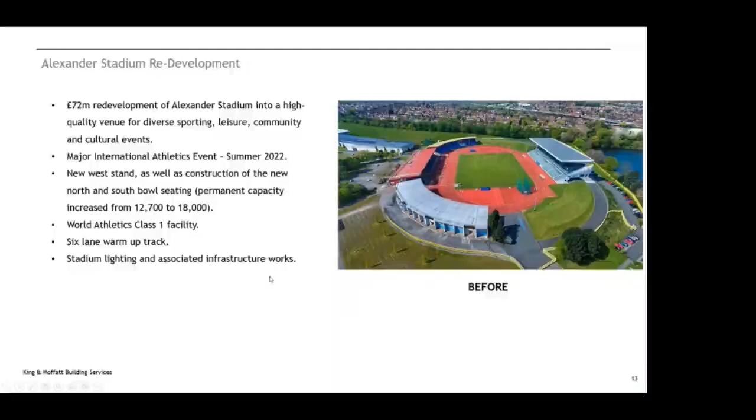Okay, so just some of the stakeholders in the project. The end user, owner and operator is Birmingham City Council. The main contractor was McLaughlin Harvey, and the location was Perry Barr, Birmingham. It was a design and build project taken from a stage 4 design created by our consultants, and the final account was valued at £12 million.

We started on the project at just under £8 million, so there was quite a lot of changes throughout the process.

Some of the things we had going on during the tender stage: we had a very close relationship with our key partner, McLaughlin Harvey, from previous projects. We had local offices in Coleshill and Stoke. We've recently relocated our Stoke office to Wolverhampton, but we were in the vicinity of the Midlands.

Obviously the pre-construction, the planning, the programmes and the organograms were created at tender stage, and it was a very close bid all the way through. There was a lot of information we had to put a lot of effort into to be successful on the project.

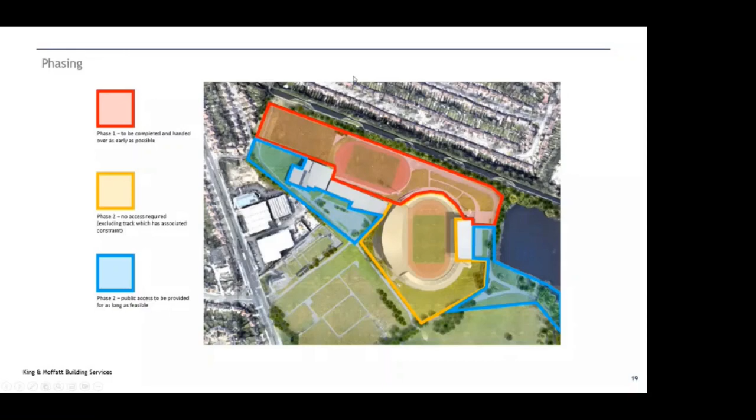Sorry about this. That's the one, sorry, a bit sensitive on the mouse, do apologise.

So we had the design at RIBA stage 4, and it was given to us as a stage 4i, which was an unusual situation for us because we were used to BG6 and RIBA stages being pretty generic, so the design was given to us as an intent. We took on board the full design responsibility, and we brought Hoare Lea in to take on the design responsibility as a local MEP design consultant.

We brought in local contractors for CDP elements, which were the fire, the life safety, the security, the CCTV, the AC systems. These were all CDP elements of design.

What we did find during the pre-construction activities and design phases of the project, under lessons learned, was that we had quite a lot of clashes at stage 5, because the tolerances that we brought through the models were greater than we were going to build to. So when we took over the BIM model, we had quite a lot of clash management and clash detection going on, which meant we had to alter a lot of the routing of the services, and there was an exclusion zone put in on the original clauses in the contract.

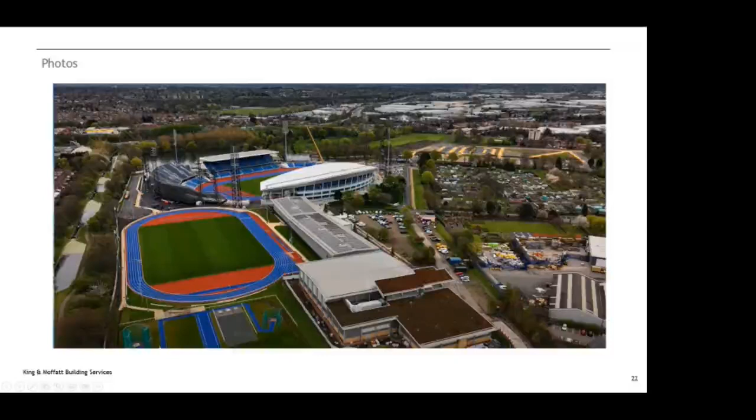The next one - that's the West Stand, the new build stand. I think it's about 5,000 capacity - yes, 5,000 capacity, substantial concrete construction. Internally you've got spaces for media, and there are the glass boxes you can see there, which were created for letting as boxes.

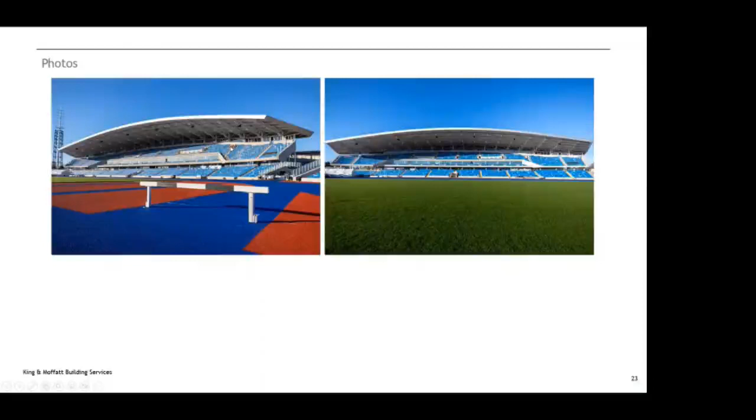The East Stand - we did some refurbishment on the health and safety, the fire alarm systems, and other services, and then the quality of it was increased. There were concessions incorporated into it for the event, which become legacy, and you can just see the columns that have been erected for the event.

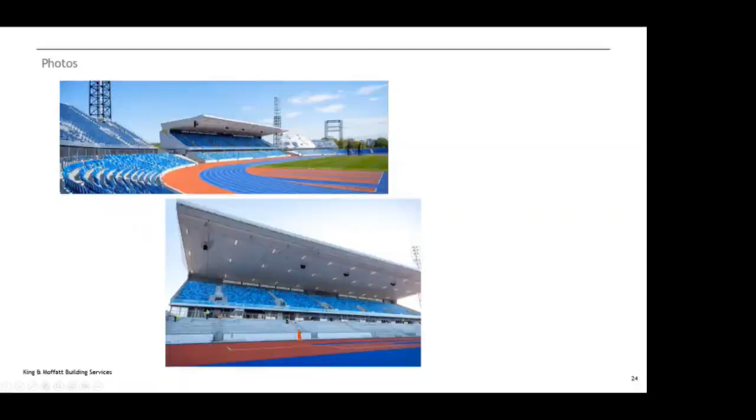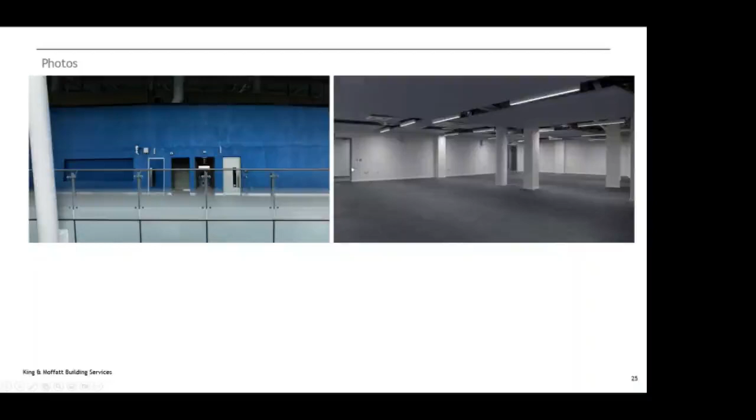These are just a couple of slides of the areas. That area there is just an open public space. On the right hand side, that's a gym - it was built as a gymnasium for gym equipment and for training, and after the games it will become a fully functional gym.

Reception areas, so a number of different facilities. You've got the reception, you've got changing villages, changing areas.

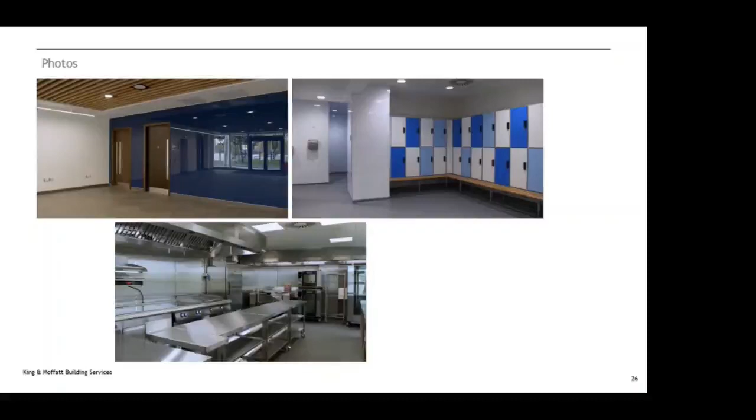The kitchen, which is below, was a late instruction, and the kitchen was in an area which was glazed on the outside. Something we've learned is that there's a lot of heat gain, and whilst we catered for the temperatures for the kitchen staff, the heat gain was on the pass where there were a lot of servers coming in and out, and it was quite considerable. When it's been functioning, we've been putting temporary cooling into the space, and that's something as part of the legacy that we're going to enhance with some cooling into the space. It was originally designed as a library, so it was adapting an area that wasn't originally destined to be a cooking facility.

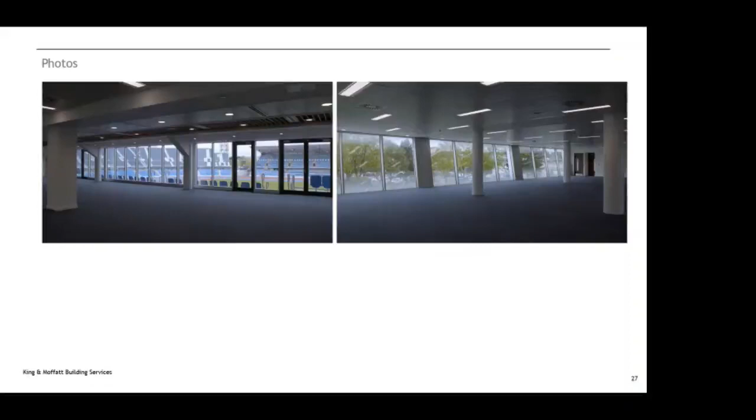On the left, you'll see this is a shot showing the erection of some of the lighting on the externals. Now, the flood lighting was designed for 8K camera presentation for the event, for the recent events.

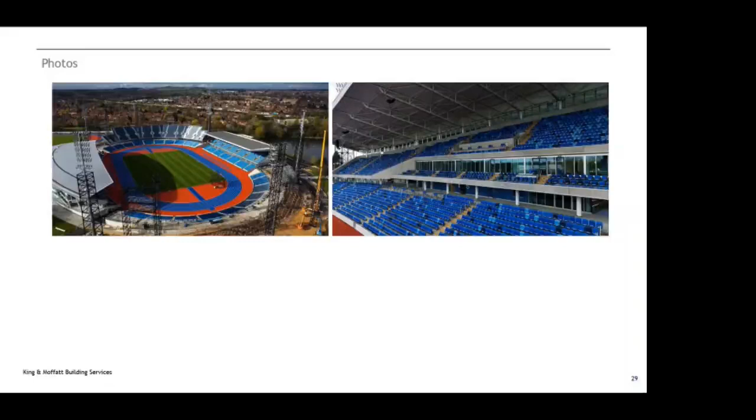Plant areas, plant rooms - good space, well designed, well developed, and easy to maintain. And then there's a bit of spare capacity for incorporating some of the fallow spaces, so it was well thought through from tender and through the process and through the design and the installation.

We've maintained the facility since completing in April, and we continue to maintain it until November. I'll explain something behind that in a minute, which again is something that we've learned through the process.

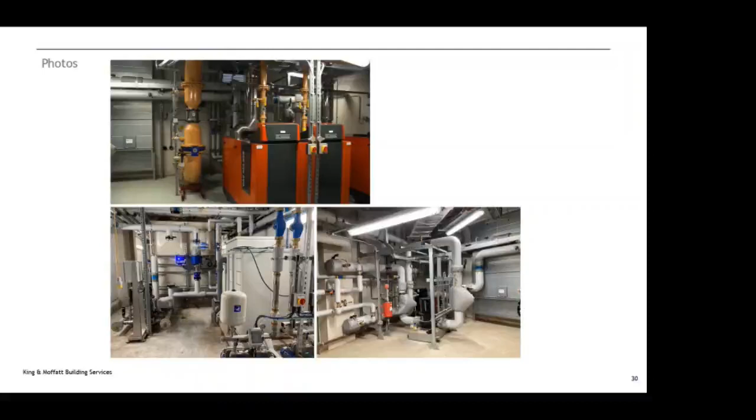Switch rooms, switch gear - obviously nothing new to anyone on this call, but this just represents the installation as we had it.

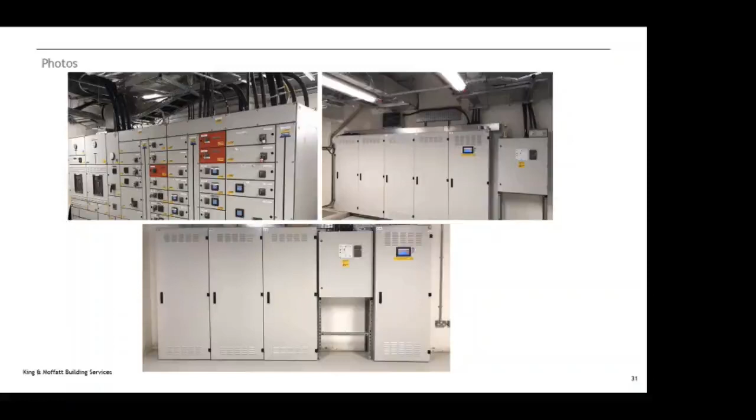These are some of the BIM models and some of the coordination problems that we had. You can see on the left hand one how tight the structure was to the services. And on the right hand side, you see the challenges and problems we had with the structure on a curving structure with straight containment, straight pipework, and straight ductwork - it just presented an awful lot of challenges.

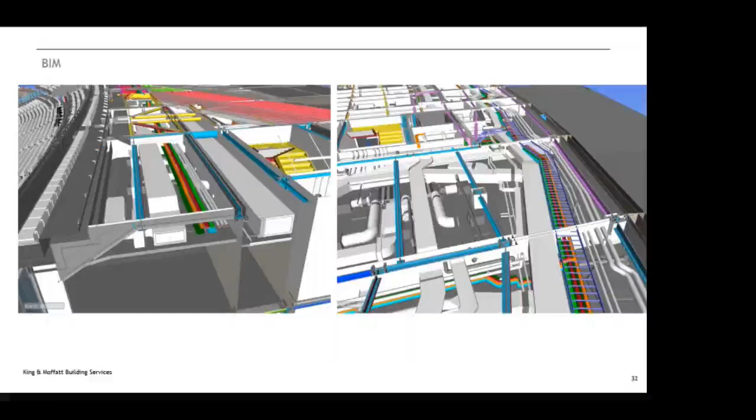On the electrical side, we had a 4,000 amp cast resin busbar, so you can imagine just going around some of those bends and having it prefabricated and manufactured was a challenge in itself. That led to a program challenge because it was the higher services, meaning we couldn't put some of the lower containment in until we'd actually got that delivered, which was on a long lead. So again, it's something that perhaps with a little more foresight could have been done earlier in the project, but then again, you don't know the size of the containment, the size of the busbar and the supplies until you've done the rest of the design. So something to bear in mind, program and design deliverable wise.

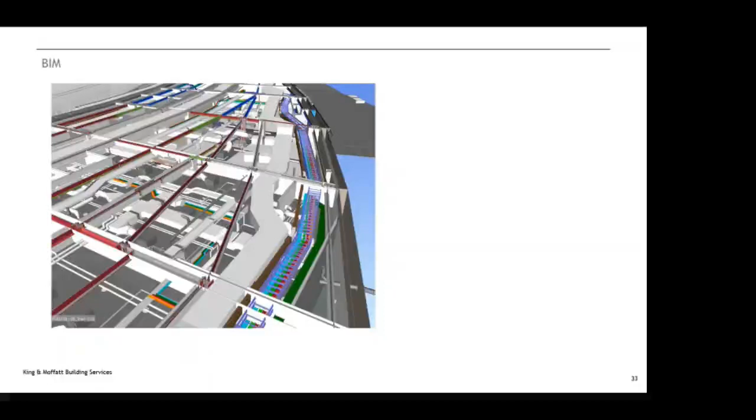Again, some more examples of taking square and straight ductwork round a curve, and the problems that came. Some of that is actually coordinated to miss low-level walls and segregated rooms, building square rooms around curved installations.

We created a hybrid solution for the existing facilities and for the new facilities. New facilities were obviously more straightforward because we could pick up something we actually knew, and we knew the suppliers, the quality of what was installed, and how it was installed. We were also looking after other facilities that we'd adopted, so we got a variety of challenges on the maintenance because there was still legacy incumbent maintenance contracts that we didn't want to nullify the warranties on.

Comment from Andrew Seal: DX pipe runs and power runs for condensers are often overlooked in coordination, yet DX cooling in AHUs is definitely gaining in popularity. Kitchen dishwasher air change rates are considerably more. So yeah, it's more just a comment.

Question: did the duct direction changes caused by the curve create noise issues, or was noise criteria quite relaxed as it's a stadium? No, it did create noise issues. Obviously the duct sizes had to be altered to compensate for it. There was a lot of wind turbulence around some of the corridors, and we did have to redesign it. Fortunately, there was capacity and area and space available, but as you saw from the BIM model, that space got congested fairly quickly to the point where we really couldn't do a lot more at the time.